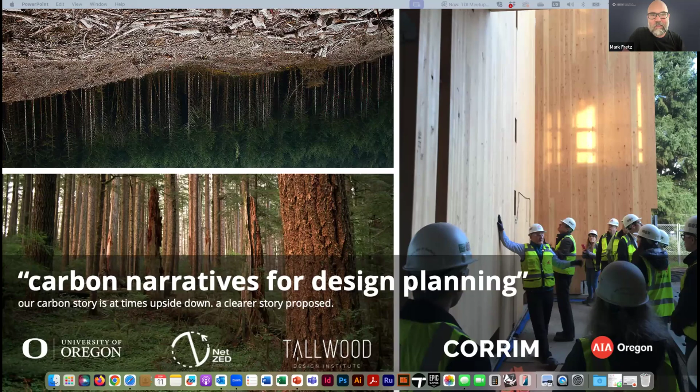We started this in 2020, which is hard to believe, it's just been a long time. At the time we were all very interested in performing, and we still are, whole building life cycle assessments. There are all kinds of different materials that go into those assessments, and as designers you get to choose those materials and have an impact on the carbon profile of buildings.

Yet there were a lot of different narratives out there from different industry groups that were confusing. Some of those narratives included, for instance, that steel is infinitely recyclable, or concrete is durable and never gets taken down, lasts forever. Whatever it may be, we were getting a lot of different narratives. That's why we called this project Carbon Narratives for Design Planning, because we wanted to try and sort those out using scholarly literature and experts in the field, to hopefully come to some consensus about these different materials we're using.

Also around 2018 to 2019, my co-PI, Professor Alison Kwok, who unfortunately can't be here today, was working on a project benchmarking embodied carbon in different mass timber buildings, again using whole building life cycle assessments. I was working with students in a class I have called Design the Unseen, doing similar carbon studies. We both recognized that depending on the analysis tool you used, and the database for those tools, we could get vastly different results for biogenic carbon.

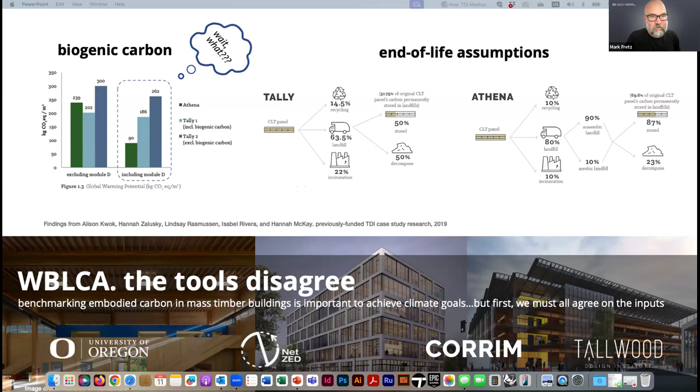That's the carbon associated with living materials, such as harvested wood products. When we asked professionals in the design community, we also found a general sense of confusion and uncertainty of those results, mainly from the mass timber building life cycle assessments due to the biogenic carbon, which got us thinking that we needed to really investigate more and harness the diverse expertise of those in academia, industry, nonprofits, and government groups working on these issues to try to sort these things out.

So this is, again, a large group effort. We've got Ethan here today — he was a huge contributor — but also Alison Kwok was a co-PI, Kevin Vanden Wymelenberg, and several other students. We worked with CORRIM on this project, as well as many guest presenters who contributed. When we first wrote this grant, it was ultimately funded by the USDA ARS through Tallwood.

When we first wrote this grant, we had this idea that we would get everybody in a room in person for a big workshop, and we were fortunate to receive the grant, and then COVID hit. So our workshop idea in person, sorting things out together in a room, was tabled, and we ended up doing something a little differently to approach this.

We started with a survey that was sent to architects, engineers, contractors, manufacturers, government organizations, nonprofits, and academics, wide-ranging groups, to try and figure out the current state of knowledge in 2020. We got 305 responses back, 180 of which were from the AEC community across North America.

And the results of the survey then informed the basis for bringing together these different panels of experts that had a diversity of perspectives. They weren't all on the same page all the time. So we really wanted to foster this discussion from these different groups.

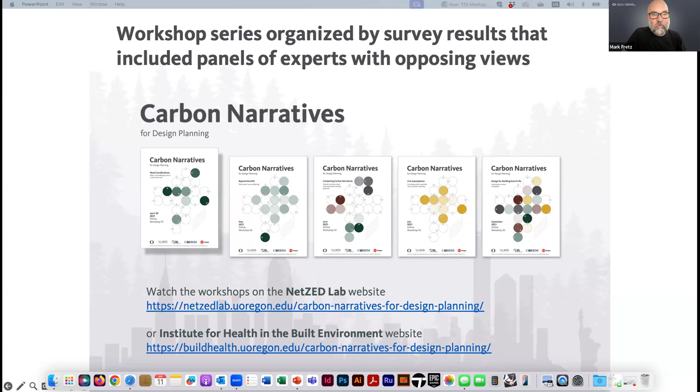Those workshops also served as the basis for further literature review, and we used those to kind of dig deeper into these topics, and then develop ultimately this graphic field guide for design practitioners and students that we could use for things like this, or for seminars that we could structure around this content. This is another kind of major output of this grant.

This is the design guide. Ethan did the graphics for this. I encourage you to check it out. It's really great, and on our website as well.

Also on the NetZED Labs website, and I think Tallwood's website will get this soon once they get their new website up and running. But again, this integrates hundreds of scholarly articles that we reviewed. In fact, this one's got over 250 sources that are cited in this document, and it's presented in a graphical format, so we think it's rather engaging, and not just pages of text.

So really great for designers to take a look at. So that is kind of the context of this project.

And since this project occurred, there have been many great buildings that have gone up, the PDX airport for one, that's really been doing amazing work with mass timber wood products and track and trace, and a lot of things that have gone on since we started this. So I'm going to just kind of start in by giving an overview, then I'm going to hand it over to Ethan to talk about some of these components.

So first of all, embodied carbon, why it matters, why do we care? Well, for one, the global building stock is increasing rapidly. It's expected to double in its current floor area by 2060. So that means we're building a lot, and construction currently represents about 40% of global annual anthropogenic greenhouse gas emissions.

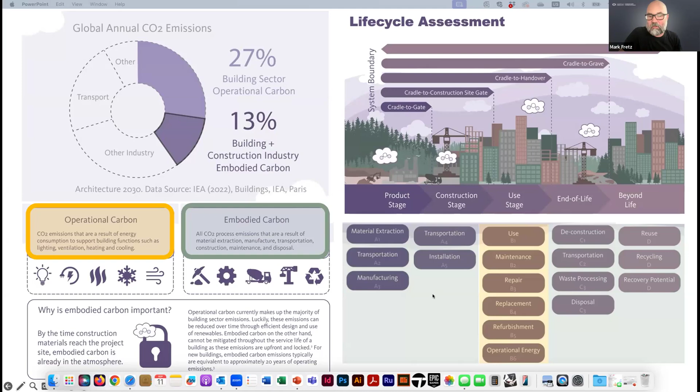When we're talking about embodied carbon, it's important for us as designers or others working on buildings to recognize structural systems and the way we optimize them as the leverage point to significantly reduce embodied carbon, particularly because in mid to high-rise construction, the superstructure of a building alone can drive up to nearly 80% of that building's entire embodied carbon.

When we look at material choices for these superstructures, we're often focusing on either mass timber, concrete, or steel. Comparing the three at face value, timber often presents itself as the lowest carbon alternative, mainly because as a bio-based material it's renewable, relatively less energy intensive to produce, and it stores carbon during plant growth. This makes timber a really powerful tool for climate change mitigation, but it does have some caveats that I'll address in a bit.

Ultimately, most structural systems incorporate some mix of all three materials, so understanding the carbon implications for each is important to use them judiciously. The next several slides will look at the opportunities and barriers for both concrete and steel in terms of decarbonization. I want to preface that while these two industries are generally considered hard to decarbonize, they do present significant opportunities for further decarbonization. The problem is without radical shifts, the barriers and limitations they face will continue to steer them off track from meaningful mid-century emissions reductions.

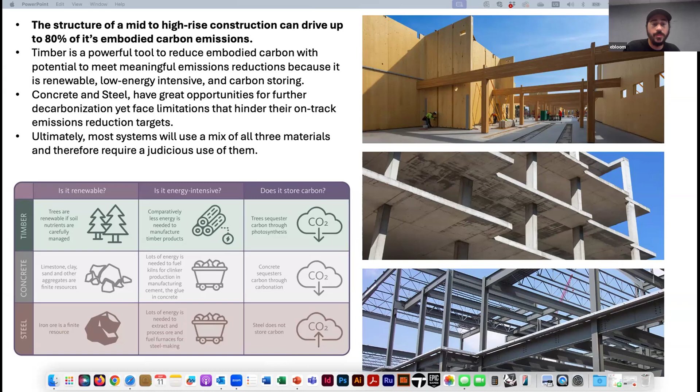Getting into concrete, concrete is the most used building material globally. It's also highly extractive, as it relies heavily on the use of sand, for which there is a global shortage driven primarily by concrete production. It represents about 8% of global annual greenhouse gas emissions, and nearly all of these emissions stem from cement production, but more specifically from forming clinker within cement production, which can drive upwards of 90% of cement's total emissions.

At the core of the concrete industry's emissions is clinker. Lime is a staple ingredient in ordinary Portland cement, and to get lime, immense heat is needed to heat limestone within the kiln. This is often supplied by fossil fuels. Limestone is heated by fossil fuels, which represents about 40% of cement emissions. The remaining 60% of emissions stem from limestone calcination, a natural chemical reaction where heat drives CO2 from calcium carbonate to leave lime.

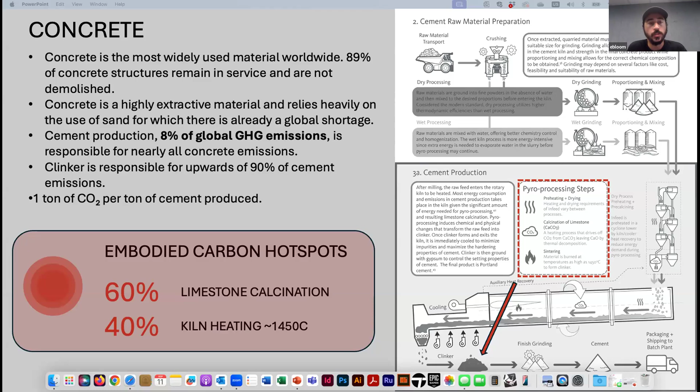Next slide. One of the most common practices today to substantially reduce emissions associated with cement is through the inclusion of supplementary cementitious materials. These are materials that look to partially replace the amount of lime and clinker content. They're often limited by availability or the extent to which they can replace lime before affecting structural properties. For some, such as fly ash or blast furnace slag, these are byproducts of already carbon-intensive processes, so their substitution in cement mixes may have benefits that are overstated from a carbon perspective.

To address the energy used for kiln heating, there's also been research into alternative fuels such as biomass or industrial waste. While these can provide modest emissions reductions, the main concern lies with the burning profile characteristics of these fuels within the kiln and how that might affect clinker properties.

There's also been research into novel binders and recycled concrete aggregate. These often don't make it past the laboratory phase, but novel binders look to replace limestone entirely. These are often hindered by the need for reform of building code and design practices, and they're also associated with higher processing costs, expensive additives, or unproven supply chains. Similarly, recycled concrete aggregate looks to preserve virgin or natural aggregate with the use of demolished concrete. The main limitations are performance concerns and variability of quality, although studies have found the sweet spot to replace natural aggregate is around 30-35% before you start to see a decline in structural performance.

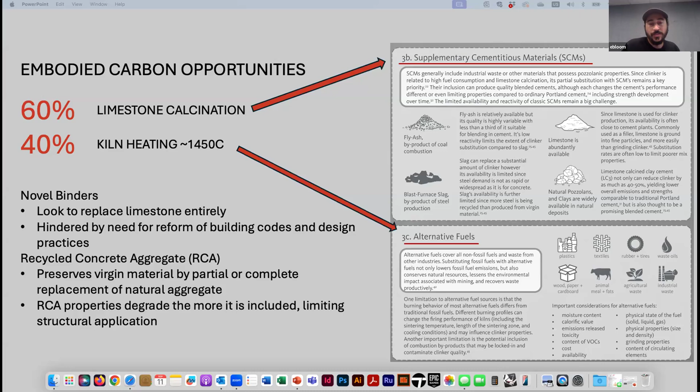Next slide. To wrap up concrete, I think an often overlooked blind spot is concrete's potential as a permanent long-term engineered carbon sink. Through carbonation, exposed concrete surfaces will reabsorb atmospheric CO2 through diffusion, which fills in the microstructure of the exposed concrete with calcite products. The diffusion rates depend on ambient conditions, but ultimately carbonation is a very slow process. LCAs, which use 50 or 100-year time horizons, struggle with how to credit those removals in time periods beyond that. A number of studies point out that LCAs excluding carbonation benefits might be understating them by as much as 20-30% of initial emissions.

Still, concrete emissions are instantaneous, whereas carbonation occurs slowly over decades, and carbonation will never offset the initial amount of emissions. So concrete, unfortunately, still remains a net emitter of emissions, and the benefits of carbonation are less applicable to new construction.

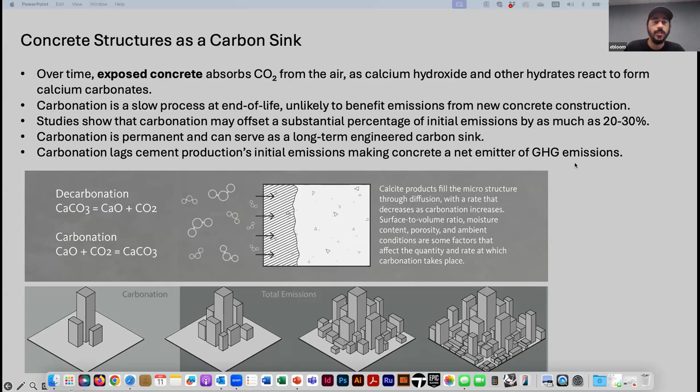Moving on to steel, it accounts for about 7% of global greenhouse gas emissions. At the core of the industry's emissions is the use of coke in iron making within the blast furnace. For context, most surface level iron exists as iron oxides, essentially rust. Iron ore needs to be stripped of oxygen in the blast furnace, which produces molten pig iron. This pig iron, however, is unusable because it's still highly dissolved with carbon, and structural steel needs a metallic iron that's stronger and more ductile.

So kind of counterintuitively, this molten pig iron will move into the basic oxygen furnace, where pure oxygen is blown through it, further dissolving the carbon content from 4% down to 2%. Other alloying elements might be included here for certain desired structural properties. But this is considered the traditional steelmaking method, and it accounts for about three-quarters of global steel production.

On average, it produces just over 2 metric tons of CO2 per ton of steel. The most efficient blast furnace, basic oxygen furnace systems might get it down to about 1.8 tons of CO2 per ton of steel. But the reason why this method remains so commonplace is because it is the one route that can accept iron ore as a main input, and generally high grade quality steel is often associated with or comes from iron ore.

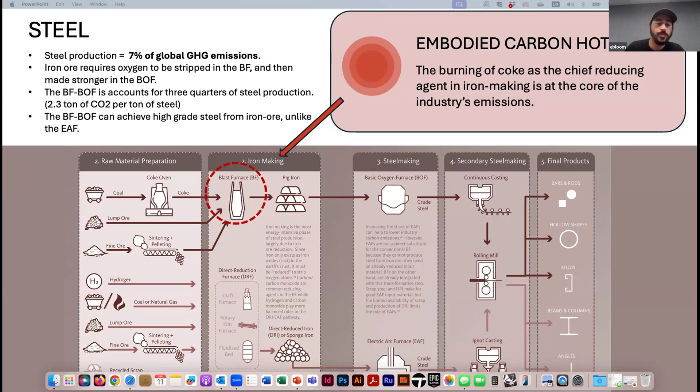An alternative to reduce steel's embodied carbon is alternate process methods. The second main alternative is through the electric arc furnace, which accounts for the remaining quarter of global steel production. It runs on electricity and can produce just shy of half a ton of CO2 per ton of crude steel it produces.

Its main inputs are recycled steel scrap, but it'll also accept direct reduced iron. Direct reduced iron is essentially iron ore chemically stripped of its oxygen within its solid state, skipping the liquefaction seen in the blast furnace, and producing a sort of sponge iron that can then be fed into the electric arc furnace. If you were to pair direct reduced iron with the electric arc furnace, it can achieve crude steel with just 60% the carbon footprint of traditional steelmaking.

If you were to use hydrogen as a clean energy carrier for the direct reduced iron equipment alongside the electric arc furnace, it can come close to net zero emissions. So on paper, the electric arc furnace seems like the way to go and very promising, but the reason why its use is so limited is because it can't accept iron ore as a main input. I'll talk more about the reason on the next slide, but because it can't accept iron ore and depends on steel scrap, there is limited availability of steel scrap, and steel scrap often produces a lower quality grade steel.

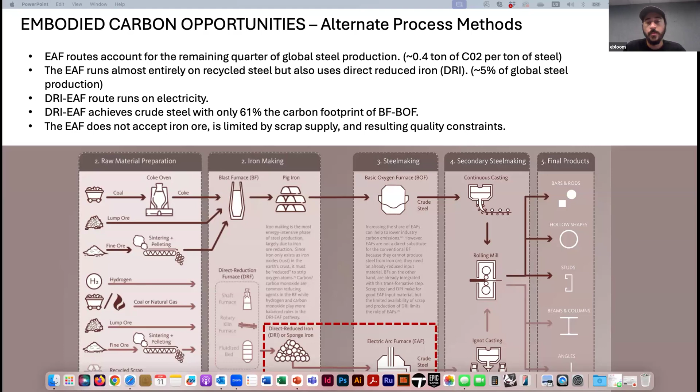A really big pro to steel is that it does have high recycling potential and as such has developed strong end-of-life markets because of it. One of the main barriers, though, is that most steel is currently locked in current infrastructure, so there is limited availability of steel scrap, and this warrants the production of virgin steel with iron ore. Again, iron ore can only be processed in a blast furnace, which is much more carbon intensive, but also commonplace.

Recycling steel also often contains residual contaminants such as chromium, nickel, copper, tin. These are harder to remove metallurgically when remelting, so it makes reprocessing difficult each time it's recycled, and it can negatively affect the structural properties of the new steel. I think recycling steel will become a key strategy moving forward for the steel industry, but it requires improved sorting and collection methods, particularly in other parts of the world where steel scrap might be going underutilized, or if it's happening at all.

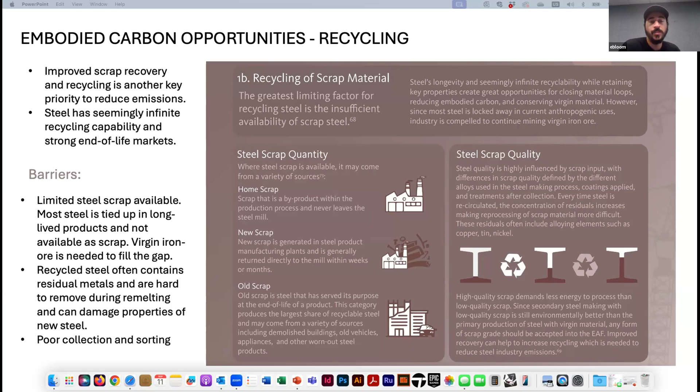And then lastly, for steel, what's considered the sort of game changer for the industry is the use of hydrogen as a clean energy carrier. It exists in large quantities as water, and its byproduct is simply water vapor rather than a greenhouse gas.

The environmental benefit of hydrogen as a reducing agent in iron making will depend a lot on the way it's produced, and so there's colors that dub hydrogen based off how it's procured. Gray hydrogen is derived from unabated fossil fuels. Blue hydrogen from abated fossil fuels with carbon capture technology. And then green hydrogen, or clean hydrogen, stems from water electrolysis combined with the use of renewable energies.

But the success of hydrogen as a clean energy carrier will depend on its feasibility to scale up and mend the infrastructure gap. Green hydrogen, at first, is already more costly than the use of fossil fuels. It would also require a huge electrical demand, and therefore a large expansion of renewable energy. Hydrogen as an element is also a very tiny molecule that can easily leak, so it requires high pressures and low temperatures, making storage, transport, and handling challenging.

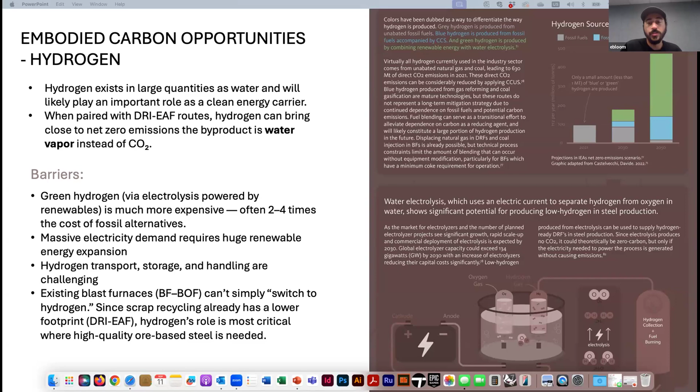So back to timber, I had mentioned earlier that timber presents itself as the lowest carbon material, but timber is only sustainable if the forest management behind it is as well. And I won't get too much into what sustainable forest management means, because I think it means a lot of different things, and the definition will change depending on who you ask.

Different forest managers prioritize different goals. But I think at the very least, it should ensure that forests remain forests, but also help to improve forest resilience, amidst directional climate change, where it's crucial to carbon dynamics.

Speaking of forest carbon dynamics, they are driven in large part by disturbances. Increasing frequency and severity of disturbances are evident in many forest ecosystems globally. And a warming climate alone could lead to extensive tree mortality over time, as seen in the case of drought, where induced moisture stress can surpass plant physiological thresholds, leading to tree die-off.

The same warmer and drier conditions that induce drought can also spur positive feedback loops that reinforce the next wildfire or insect outbreaks. These disturbances can cause large-scale tree mortality within a relatively short amount of time. These all impact forest vegetation growth, reproduction, survival, and distribution. And because this is carbon narratives, from a carbon perspective, they can also significantly alter forest net primary productivity.

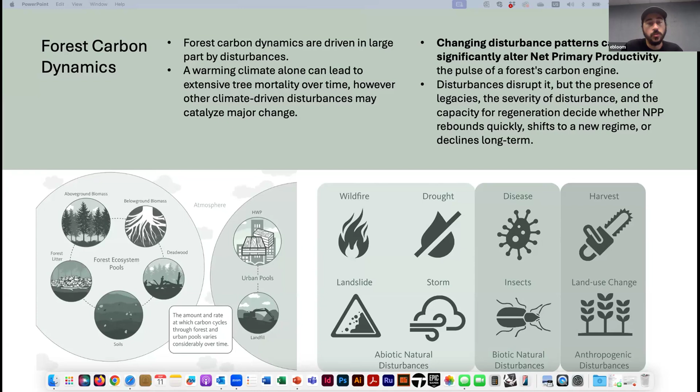So disturbances disrupt net primary productivity, but forest resilience and the capacity for forest regeneration will determine whether it rebounds, shifts to a new regime, or declines long-term.

It's really important to emphasize and improve on forest resilience, which is the ability of forests to recover post-disturbance. And a lot of the ways that forests manifest forest resilience is through disturbance legacies.

These are the physical and biological markers, traits, species adaptations, and features that are left behind in a forest post-disturbance. And so these can include deadwood, root systems, surviving plants, seeds, spores, and animal populations. All these act as a sort of memory bank of the pre-disturbance forest, and they carry forward the ingredients that make recovery possible.

Disturbance legacies help to facilitate regeneration, ensuring that forests regrow faster and more effectively than if the area had to recolonize from scratch. They maintain biodiversity, supporting a diverse ecosystem through the recovery period.

What's really important is that they also enable adaptation to future disturbances, improving the forest's ability to cope with repeated or novel stresses. And I think this is really where the concern lies, because climate-driven disturbances now will likely catalyze rapid reorganization of forests through a series of abrupt and episodic events which can erode the ecological memory of forests to disturbances. This can create a resilience debt that then shapes forest trajectories, determining whether they'll remain forests or some other type of land use.

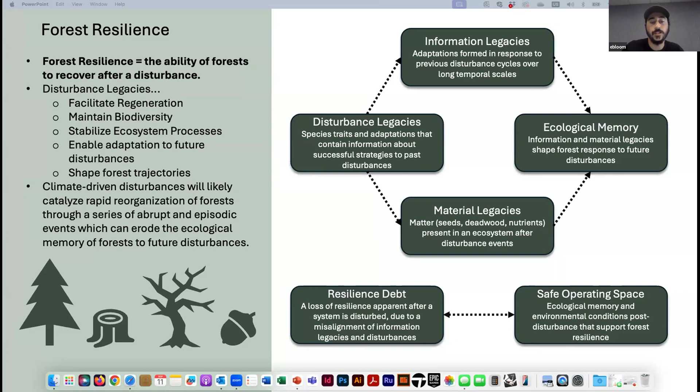I think an important way to achieve forest resilience is by using wood more efficiently rather than extensively, so as to ensure that forests remain forests via an increased safe operating space. By increasing that buffer of what we harvest versus what we leave intact, it maintains natural regeneration and productivity, ensuring that forests don't lose the ecological engine that allows sustainable yield.

Protecting biodiversity and ecosystem functions works within the contextual bounds of forests. It avoids overharvest, but maintains genetic diversity. And also just working to grow resilient forests reduces the risk that timber supply collapses after an extreme event, thereby supporting long-term carbon storage and wood yield.

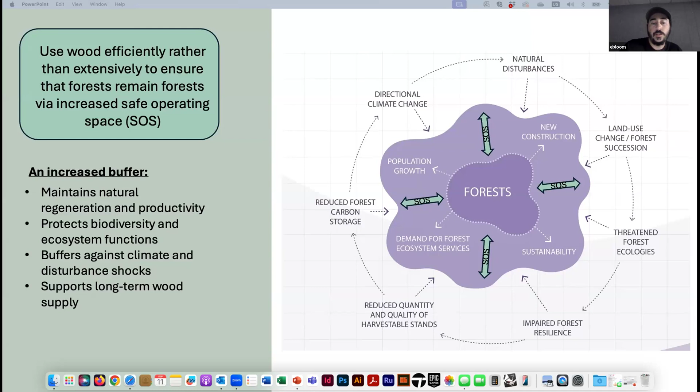Okay, next slide. So life cycle assessment, or LCA, is a really important tool for us to be able to compare what we're designing with alternate designs and benchmark buildings.

This also reminds me of this old quote from George Box that all models are wrong, but some are useful. And actually, I think these LCAs are extremely useful, but we should also recognize that they're complex assumptions from these really dynamic systems that are going into these models, and so that's where things start to get a bit complicated.

So we often hear that wood is carbon neutral because it's a renewable bio-based material, which will be replaced by another tree, sequestering its associated carbon after it's extracted. But carbon neutrality does not always equal climate neutrality based on timescale.

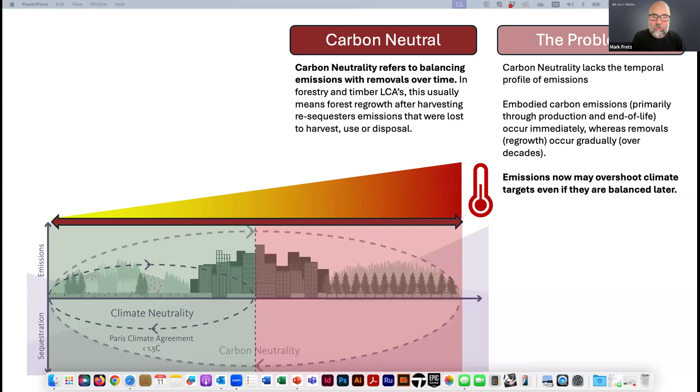So carbon neutrality makes several assumptions, such as steady state forest regrowth, and it can also discount the complexity of emissions and sequestration. So being carbon neutral does not mean that we will necessarily meet climate goals, which are climate neutral, because those emissions occurring now may not have enough time to be offset as we try to target the drawdown within the next few decades. So that temporal aspect is important.

Climate neutral considers that the timing of carbon fluxes varies with time horizons, cycles of forest regrowth, and disturbance risks, for example. So if tree mortality accelerates, sequestration assumptions may be too optimistic. So those are a few of the things that need to be considered.

So to allow time for offset of carbon emissions, harvested wood products should be converted into building products that are long-lived. That's important. Harvesting trees solely for bioenergy production is an example of a wood product that's not necessarily climate neutral, even though it would be carbon neutral, since this would produce more immediate atmospheric carbon during the period in which we must be reducing atmospheric carbon to meet climate goals, and has to do with the longer time scale required for that carbon reuptake to be considered.

So that's an important consideration as we think about selecting materials and using them in a way that allows their long life and durability.

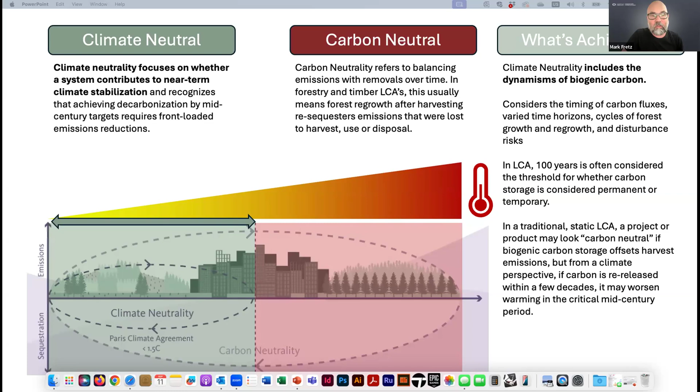We began the project again in part due to the widely variable LCA outputs, and therefore the uncertainty in the models that designers were encountering, especially when examining bio-based building materials due to the biogenic carbon, which is known as the module D component for LCA.

We've since learned that modeling carbon flows is difficult, and it requires large models that make assumptions and inputs from other large models. For this reason, many current LCA tools use a backward-looking approach to assess carbon sequestration.

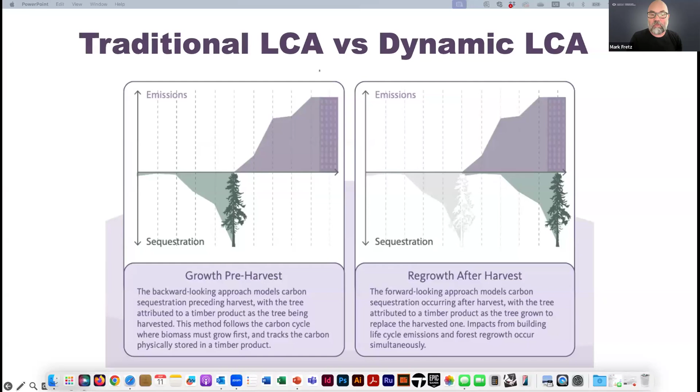So moving into more timber cities, into developing and growing timber cities. Ethan, I'll let you talk about substitution benefits. Sure. So up until this point, assuming that we're sourcing our timber from sustainable forest management, being good stewards of forests, we can now really maximize the benefits of timber as a bio-based material.

And that starts with substitution benefits. The choice alone to use a lower carbon material like timber in place of a higher embodied carbon material like concrete or steel provides immediate emission savings, which is crucial from a climate neutral perspective to address near-term mid-century reduction goals or targets.

Some might argue that substitution benefits for timber are overstated because LCAs don't allow enough time for other industries to decarbonize. But the same can be said for the timber industry, which is always looking to improve. And we're concerned with near-term reduction targets. A lot of LCAs comparing timber products to concrete or steel counterparts in varying contexts oftentimes show timber with the lower global warming potential. So substitution provides immediate emission savings.

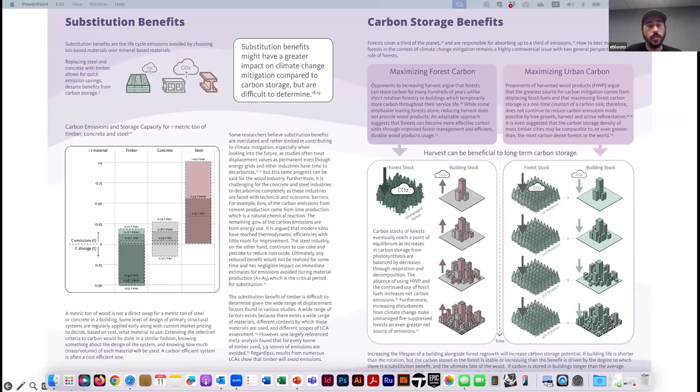On the other hand, maximizing carbon in both forests and the built environment, working with steady state forestry, where new stands of forest maintain or even surpass the carbon levels of the forest that preceded it, you can then begin to allocate carbon into the built environment and create a continued benefit or contribution to carbon storage that maximizes the overall land sink.

So as we transition to timber cities, we can have a significant reduction in carbon emissions by 2100 based on the studies that we found. One of the studies we found pretty important was by Mishra et al. in 2022, which found that if 90% of the population lived in timber cities by the end of this century, this could realize a 77% reduction in atmospheric carbon over business as usual approaches.

Part of that, though, requires sustainable forest management and keeping forests as forests to realize these benefits. We need to be mindful that wood products are produced with sustainable forest management, as Ethan talked about earlier, and that we maintain strong governance and careful planning to protect frontier forests and biodiversity hotspots. According to Mishra et al., in addition to protecting frontier forests, this transition would also require an increase in trees and in global forest plantation areas, which is still possible alongside land use for other agricultural food production processes. So that was their finding, and the paper was pretty influential in our ultimate findings to this project.

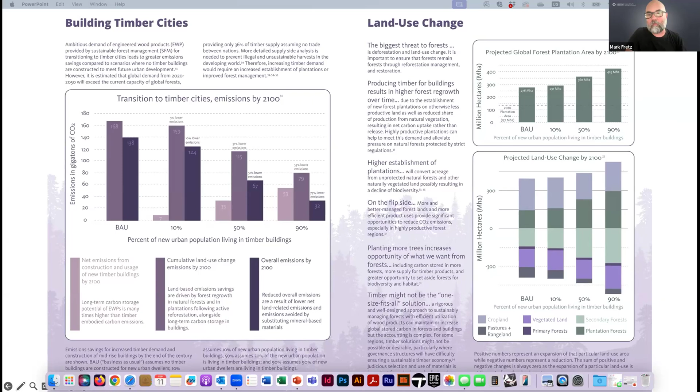Wood product certification and chain of custody are also important for designers to feel confident that their material selection is what they expect. So with that, I think we can give the main takeaways that we had for this project.

We had a lot of different takeaways, but the top takeaways were that first of all, global building stock is expected to double by 2060, and we're building a lot. So it doesn't matter whether we're using timber, steel, or concrete — all materials have impacts, and we need to be careful with how we use them.

Buildings account for 40% of global CO2 emissions. So we've got a role to play in mitigating climate change as designers, and can really focus on the system that we're using. Embodied carbon becomes locked in today's building projects and cannot be reduced over time like operational carbon, so we really need to be mindful of that during the design process.

Building structural systems are the largest source of embodied carbon in a project, up to 80%. So really focus first on the structural materials, which will have the greatest embodied carbon impact. Structural materials that are bio-based, such as mass timber, offer a potential solution to mitigate these embodied carbon emissions. The quickest means to reduce global warming potential at the material level, though, is to use all materials efficiently, and therefore use less of them.

Reuse existing structures is a great way to do that. Reuse existing materials, and substitute carbon-intensive materials derived from fossil fuels with low carbon materials.

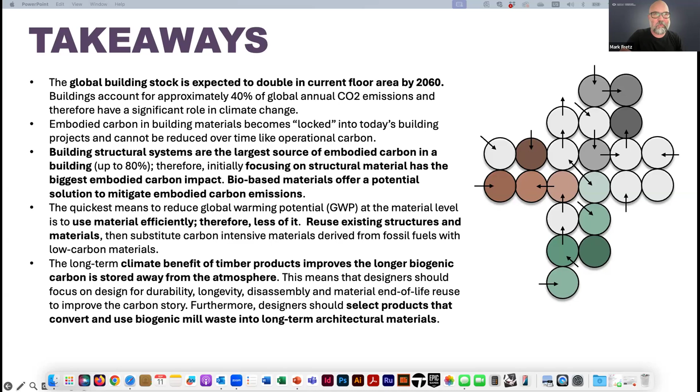Furthermore, we should select products that convert and use biogenic mill waste into long-term architectural materials. I'm a big fan of wood fiber insulation—that's one material, for instance, that converts that waste. Those are a few of the initial takeaways. I'll let Ethan talk about a few others.

Back to the forestry aspect of it, letting trees mature without harvest would only create a one-time benefit of carbon storage. Active forestry does have a place in creating a continued contribution to carbon storage. This also creates a paradigm shift from buildings as carbon sources to buildings as a carbon sink. This is particularly true for the transition to timber cities.

A lot of modeling studies often see timber as a viable climate change mitigation solution because of its lower global warming potential. But I urge designers to interrogate or at least better understand LCA assumptions, because biogenic carbon is very complex. We touched on this a bit with dynamic LCA, which looks to paint a more holistic understanding of the carbon story for wood products.

But there's still a lot of unknowns and uncertainties in how to accurately model or account for it. So just being aware of those assumptions you see in your EPDs or whatever would help you make better decisions for sourcing and procurement of wood.

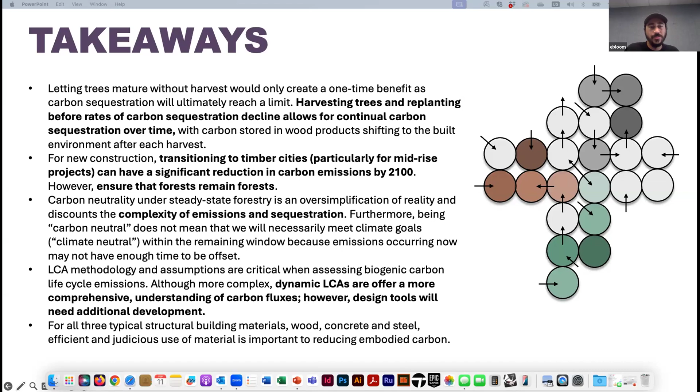With that, I think what we're going to do is shift gears and ask Blaine to present and then take questions at the end so we can integrate both projects. This was the highlight, but enough material for a whole semester seminar, so you should go to our website and look at the full document which has even more content in there. There definitely was a lot that we did not get to cover.

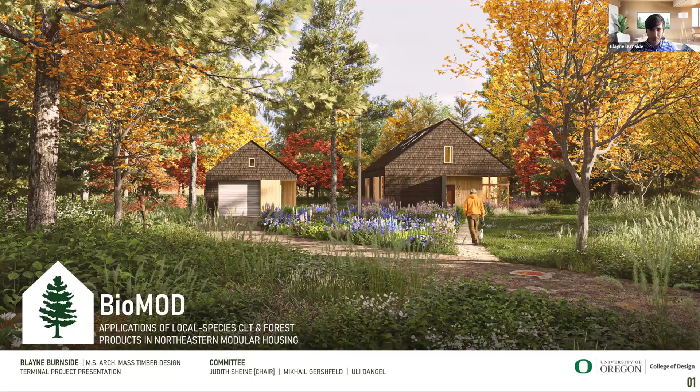So I'm going to shift focus a little bit. While the carbon narratives really focused on the broad scale integration of mass timber into big construction at large, I was interested in looking at a different kind of comparison—how mass timber really measures up in its related construction system considerations to light wood frame conventional systems for low-rise residential construction, something where mass timber is not as focused, rightfully so at this point.

But first of all, I'd like to thank you all for being here. My name's Blaine, sorry I forgot to introduce myself. I'm a recent graduate of University of Oregon's Master of Architecture, Master of Science of Architecture programs. What I'll be showing you today pertains to my Master of Science terminal research project, which had to do with mass timber design in the residential sector, and covers carbon analytics with some of the analyses I'd conducted.

So the project, I named it BioMod, and it looks into the applications of local species CLT and forest products in modular housing for the northeastern United States.

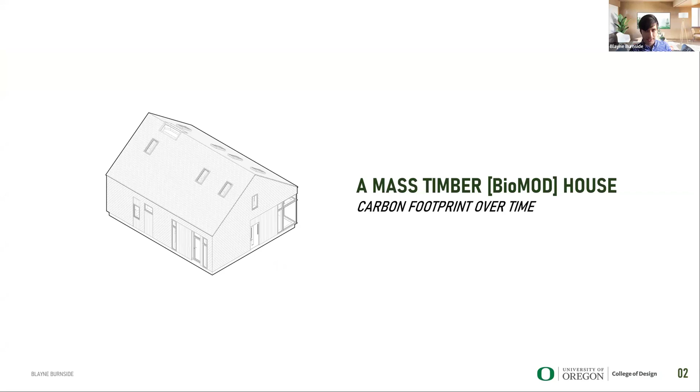So the main objective of this project really was to devise a panelized mass timber housing system for single-family residential application, which prioritizes the use of biogenic materials and a reduction of necessary finishes beyond the structural elements.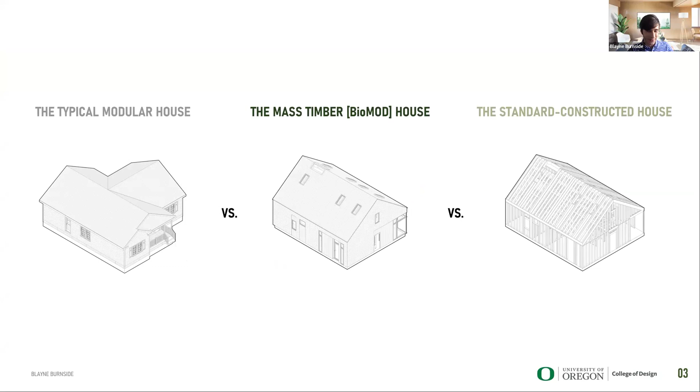After which, the idea was to compare my design system between two other cases of relevant conventional construction typologies. On one side, the BioMod design system was to be compared with the current typical construction typology within the modular housing industry itself. On the other side, I wanted to see how the biogenic mass timber system compared with conventional lightwood frame construction and its associated common practice material palette.

Overall, the project was comprised of three main parts: background research, the design of the BioMod system, and analyses, where several areas of performance characteristics and quantitative metrics were looked into.

For the purpose of our discussion, I'm just going to mostly focus on giving you a general overview of the BioMod design system itself, providing some background, and of course, the comparative analyses of embodied carbon that had been performed between the three construction systems. So let's get into it.

To begin, the focus area of the project is really formed around three primary motives: to portray the use of locally made mass timber for the northeastern United States specifically, demonstrate the benefits of biogenic materials in buildings, a place where carbon plays a key role, and support the rural housing sector and forestry in the region.

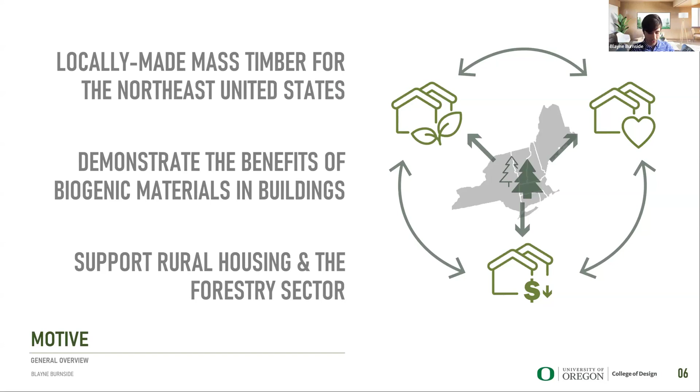From those motives, as well as through the background research I pursued, it was ultimately determined that my project would focus on designing single-family modular housing using eastern white pine as the tree of choice for mass timber in this project. It's all hypothetical.

I would then, of course, conduct a series of comparative analyses between my design system and the related conventional systems in an effort to reveal the potential competitive advantages of biogenic mass timber assemblies in low-rise residential application.

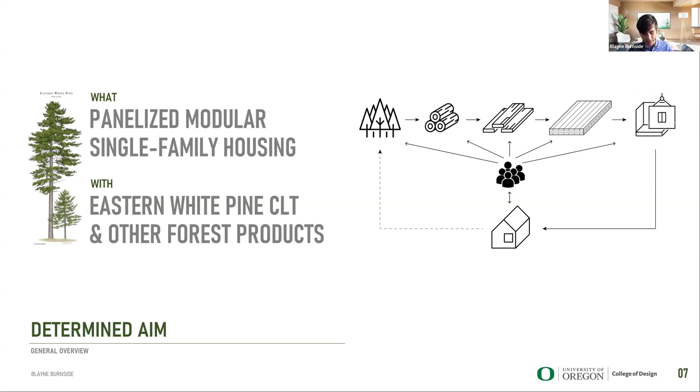I also looked into several volumetric and panelized modular mass timber home case studies that already exist in North America, which is very promising because it supports the notion that there is some degree of interest for mass timber integration into the low-rise and mid-rise residential building sectors.

Mark and Ethan very clearly touched on carbon in the built environment and why it's so important. Architecture 2030, in 2023, actually updated the quantity metrics of the total embodied carbon in the built environment up to 42%, with about 15% being related to construction materials and their fabrication. So the quantity of the pie has only gone up since the 2022 metrics, which is only even more of increasing concern. It's a big deal because we're seeing more frequent and extreme climate events, and carbon emissions, of course, are a primary culprit of that.

Various ways we can really work to reduce carbon impacts of the building sector include decreasing operational energy demand through properly designed enclosures, prioritizing renewable source carbon sequestering materials, and sourcing them locally to reduce transportation-related emissions.

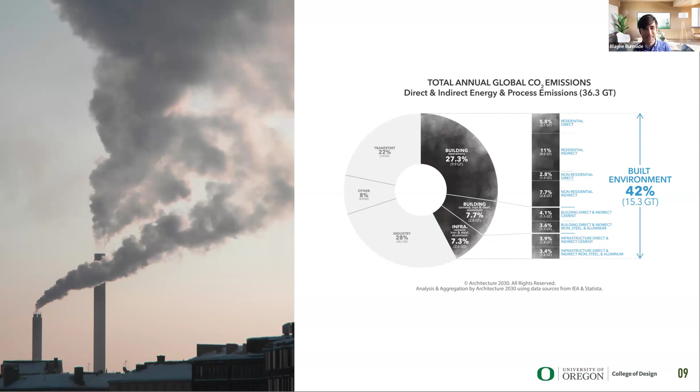So this project pertains to modular homes, and the general modular home industry looks like this, where modular homes are just another common housing solution beyond standard site-built houses in the Northeast and the United States as a whole. These homes are prefabricated off-site and shipped in whole volumes to be stitched together on site. After this, the volumes have been taken off their steel shipping chassis so that they can be treated as a standard home as far as codes go.

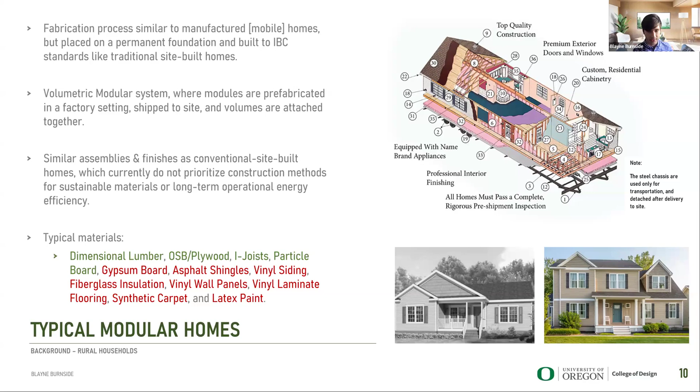Their construction assemblies are also much like that of new construction conventional site-built homes, which consist primarily of materials from non-renewable sources beyond their structural members, several of which may be adverse to occupant health. Many of these materials, though, are not necessarily dependent on the structural typology, but are simply the industry standard materials of choice at this time—things like fiberglass insulation, gypsum wallboard, those kind of things.

So where could mass timber products come into play with this modular industry to make improvements? Well, as biogenic engineered products that can take the form of large structural panels, such as cross-laminated timber, a mass timber constructed home could reduce materials usually associated with being needed to cover up light wood framing. It could derive a house proportionally made from more renewable material mass, and of course, sequester more carbon.

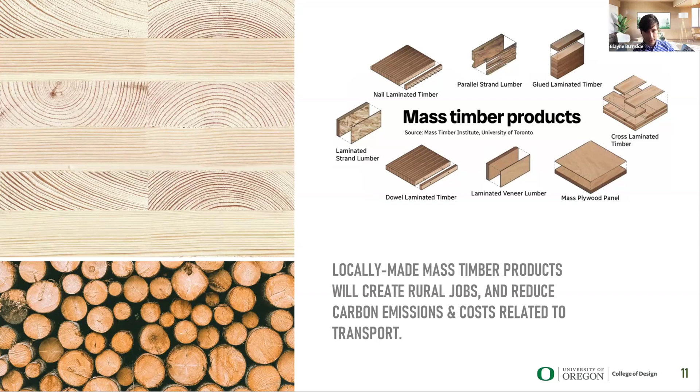This is a result of being physically more massive fiber taken out from the forest, so keep that in mind. If CLT were also produced locally instead of being imported, it could create rural jobs and reduce the carbon emissions and costs related to that distant transport.

So those are really some of the general conditions that the project set out to respond to. Now let's see what mass timber could actually do in action in this sector.

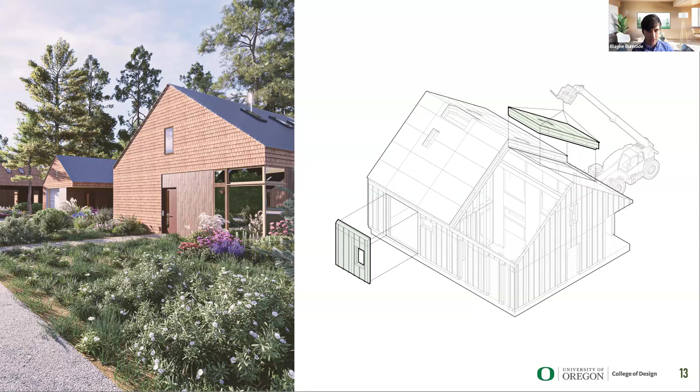The BioMod system is what I devised, an additive panelized mass timber modular design for single family dwellings. It works on an 8-foot wide CLT panel module, which can be easily shipped and evenly divided into smaller parts when necessary. It's a system designed for expandability, where the construction assembly and module layout enables aggregation, as do the construction details, which I won't be showing today. A panelized modular system was chosen over a volumetric one because it allows for greater flexibility in variable expansion, as well as efficiency in shipping the parts.

The assembly panels are designed to have the insulation, weather-resistant membranes, and furring prefabricated to the CLT panels before they reach the construction site, after which the exterior cladding is attached. This would increase the efficiency of the panelized modular construction by reducing the time needed for on-site assembly, which would in turn save on labor costs, construction emissions, and reduce potential error caused in the field.

In case you're wondering about the architectural form, the BioMod system was designed to be rooted in the Northeast. I know we're in the Pacific Northwest, whose vernacular principles are generally centered around a compact form and gable roof, most appropriate for the drastic swing in winter and summer climates in that region. These formal principles would aid in optimizing the energy efficiency of these homes.

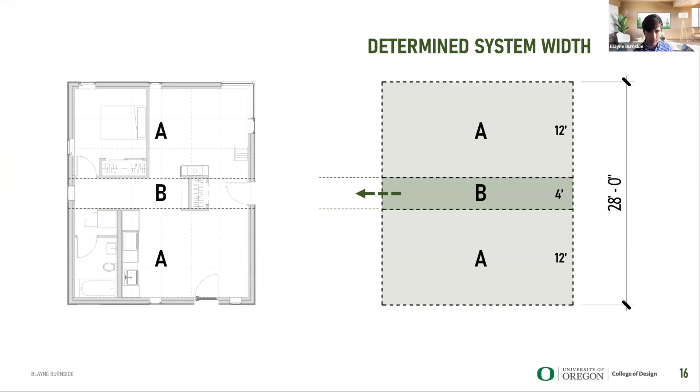Through iteration, it was determined that this system would work on a defined 28-foot width, with expandability focused on one axis. At 28 feet, the layout provides an organization of a centralized 4-foot circulation datum flanked by two 12-foot bays, a dimension that's typically deemed accurate and adequate in providing comfortable living space.

The starter home is the base condition of the design system, where predetermined space modules are organized into a functioning home. With an interior floor area of roughly 672 square feet, the starter home expresses the intention by which biomod houses are designed to be relatively compact, in order to lower the overall footprint of the home to reduce initial costs, ongoing energy demands, and total embodied carbon of the construction.

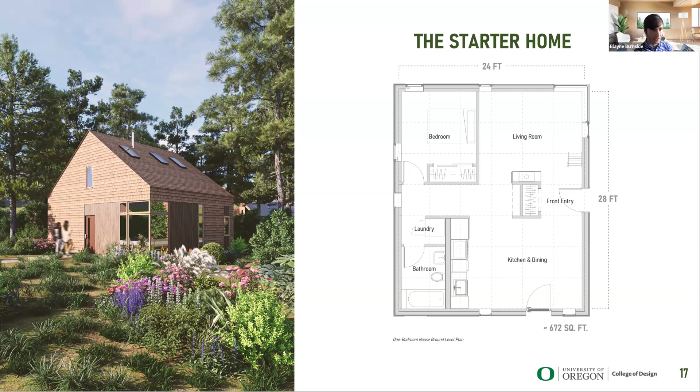As mentioned, these houses are designed to be expandable as part of the modular system, which helps support aging in place, where individual households and families are able to grow within a home that can grow alongside them. This really helps to form and retain genuine communities, and lower the vacancy rate of housing.

All of which enables a mindset for society to hopefully focus on long-term investment and care, a place where mass timber would have the greatest advantage. With the ability of a biomod house to start small and grow later, this reduces the initial cost barrier from home buyers, as well as on our forests up front.

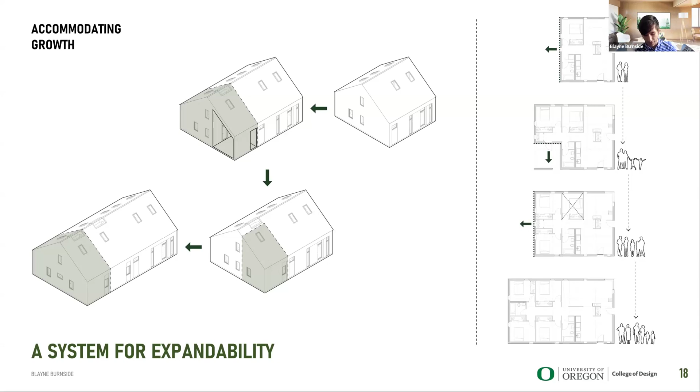As for shipping, the efficiencies achieved as a result of the panelized modular system of 8-foot wide panels mean the components of a house can simply be flat packed on a standard semi-truck and brought to the site. This really helps to avoid the carbon emission penalties associated with oversized load shipping, for instance.

We need pilot cars in some scenarios. The pieces of the starter home, for instance, could all fit on a single semi-truck, after which 2 or 3 semi-trucks would be required to ship a whole larger house at once. I guess this doesn't include the windows and doors that would also need to be shipped.

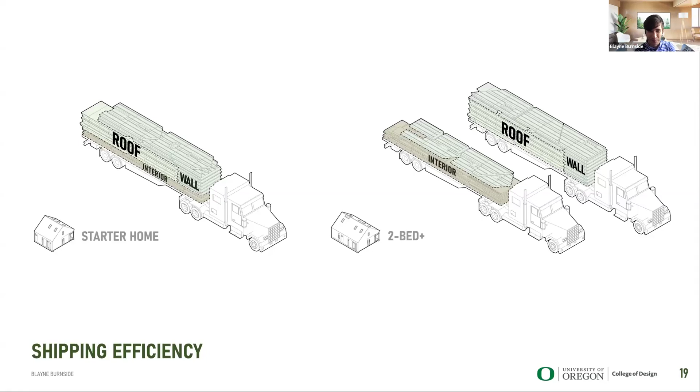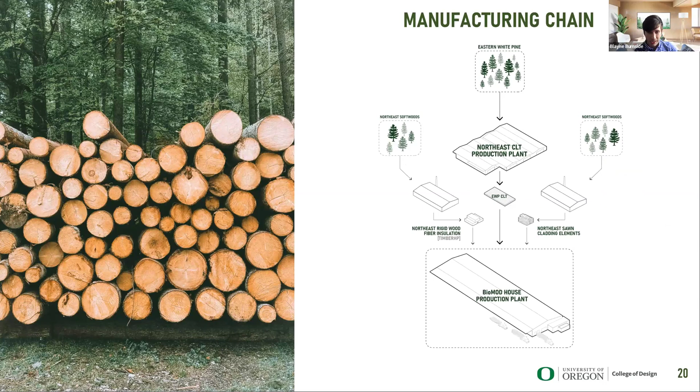Looking at a theoretical manufacturing chain: almost all materials above grade come from timber, so the CLT material would optimistically be sourced from sustainably harvested eastern white pine, produced at a CLT production facility located directly in the Northeast. Obviously this doesn't exist yet. Forest products would then make their way to a production facility where the biomod house panels and kits would be prefabricated.

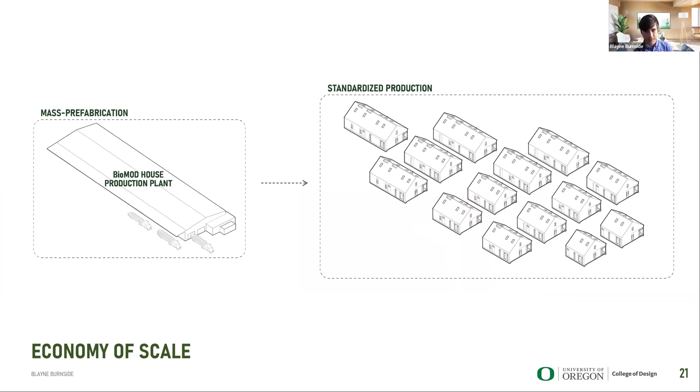Once at the production plant, the biomod homes would ideally be produced in a volume of standardized units, which is also the method in which current manufactured and modular homes are brought to market. This aids in driving down unit cost, making a mass timber construction system relatively more affordable. As the design is comprised primarily of renewable biogenic material, the system could possibly function as a closed loop of efficiency in the long run, in a perfect world.

So this all comes together again to form a home that's designed to be compact but feels spacious at the same time, while also reducing the need for finished materials, yet improving biophilic qualities of interior living space. I hope that provided a good enough overview of what the house design is. So finally, let's get into looking at the carbon narrative between the mass timber system and conventional ones.

To begin, the various analyses are structured in an organized and consistent fashion, where a representative typical modular house that I designated through background research is set against the representative biomod mass timber house in the center, as well as a standard conventional light wood frame constructed version of the biomod house design, compared on the right.

Keep in mind that the typical modular house model is larger in square footage than the biomod house and its light wood frame constituent. This is intentional because the system I derived has a smaller footprint for the same type of home, being 3-bedroom, 2-bathroom in this case, the average sized home in the Northeast. So we'll mostly be focusing on carbon analyses that I did through life cycle assessments.

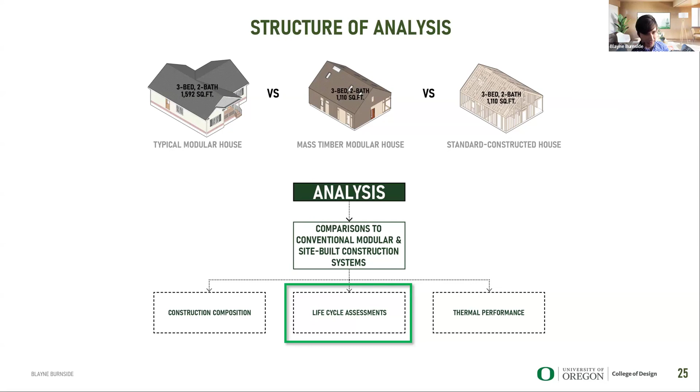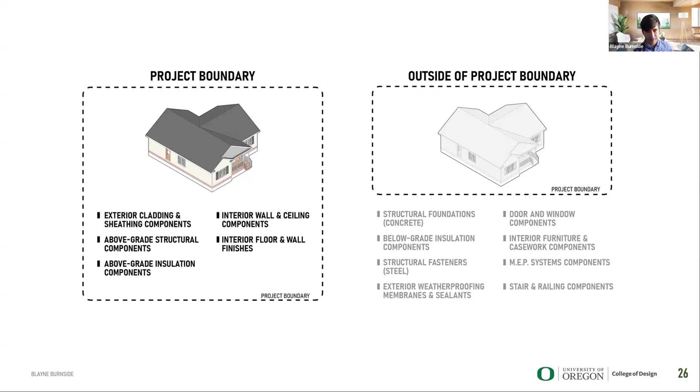Before I go further, it's important to note that the project boundary for these studies does not include every aspect and component of the whole construction of a home. Instead, aspects that remain relatively consistent as part of each building system's character definition are kept in the project boundary, whereas components that would easily fluctuate in character and method are not included. So this means foundations and steel fasteners are excluded from these studies, among other things, which of course would affect the end results of a true construction type.

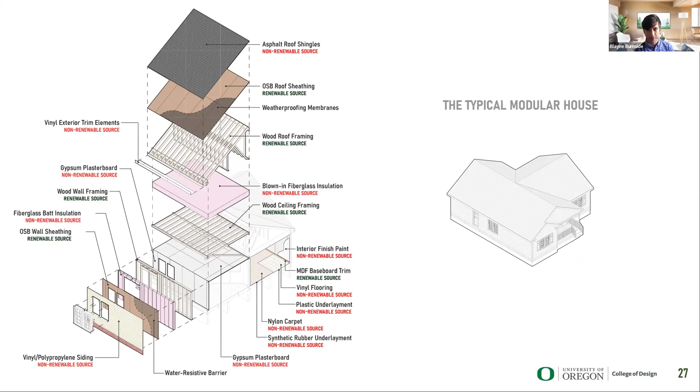So this is a typical modular house assembly. It's a light wood frame constructed system with an unheated, ventilated attic roof structure. As you see, almost all the materials that go beyond structural framing and sheathing are made from non-renewable source materials, as the typical industry standard material choice.

Looking at the proposed mass timber home, the opposite is true, where almost all materials come from renewable sources, being trees in this case. Different from the typical modular house, the attic space is now included as a loft level within the conditioned space. I'd like to point out that this is located in the Northeast, so wildfire is not necessarily as big of a concern as to why I have wood cladding on this home.

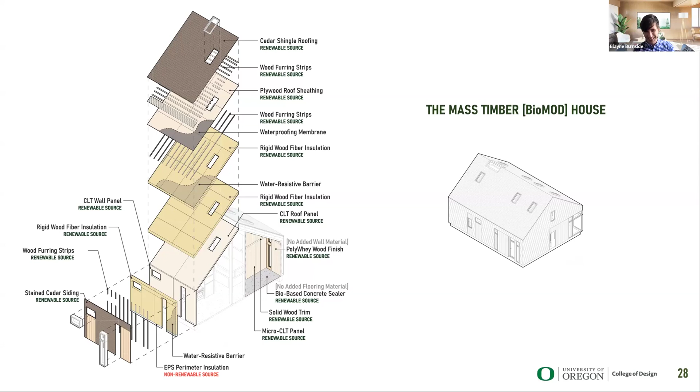Looking at the last system, the same formal method for the light wood frame version of the design remains true. The system shares the same cladding and ground floor elements as the mass timber house, since those aren't directly dependent on which structural system is used. This was to keep everything even.

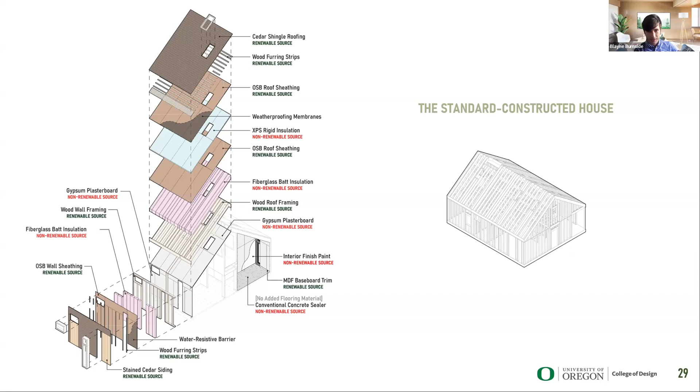The prong of analyses we're focusing on is the life cycle assessments, which will map out the carbon emissions and global warming potential of each building system using the traditional life cycle assessment method. I used One Click LCA software as the analysis tool of choice, where I did my best to select the most appropriate environmental product declaration within the platform for each material.

Various LCA scenarios were mapped out in order to get the big picture of each system's embodied carbon characteristics within the study boundary. It's important to note that for the purpose of this analysis, transportation-related carbon, repair percentages, and operational energy were omitted, as those could vary among each system.

In One Click LCA's 60-year benchmark score assessment on the left here, it provides a little snapshot, and even so, the biomod house wins as the most sustainable construction type in terms of carbon emission. But let's see just how.

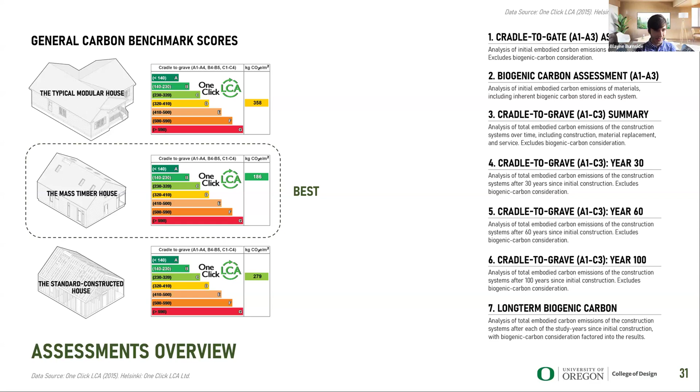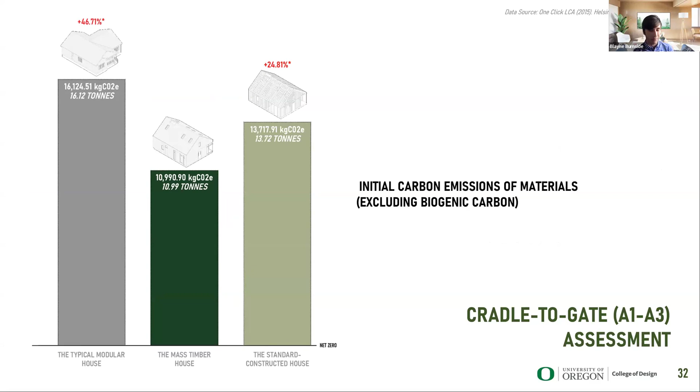A cradle-to-gate assessment analyzes the carbon of a building only up to the point when the materials reach the construction site. This is useful because it displays only the amount of carbon inherent in the building materials themselves. This graph shows each system's total initial carbon emissions by the time materials reach the construction site, but this does not yet consider the inherent biogenic carbon stored in some of the materials involved.

If we fold in the biogenic carbon, you can see that the sequestered amount between the two light wood frame systems and the mass timber system are significantly different, with the mass timber, due to its sheer volume and mass of fiber, storing a lot more carbon.

So why is biogenic carbon important at all? Well, this is carbon that's been pulled from the atmosphere and held within the structure of an organic substance or plant during its life.

In terms of construction, these materials represent the embodied amount of carbon previously pulled from the atmosphere and now banked within the building. Having biogenic carbon stored in a building can help delay the rate at which carbon would be re-released into the atmosphere if left as a plant to naturally decay, which can be a great advantage in delaying or reversing the effects of climate change.

The longer a building with biogenic carbon can last, the longer it can actually sequester that carbon, which is why the need to build longer lasting buildings and housing stocks is important now more than ever. Bottom line, if you want to use biogenic carbon as an advantage, you better make sure the structural system can last longer than the tree will remain standing in any given forest stand.

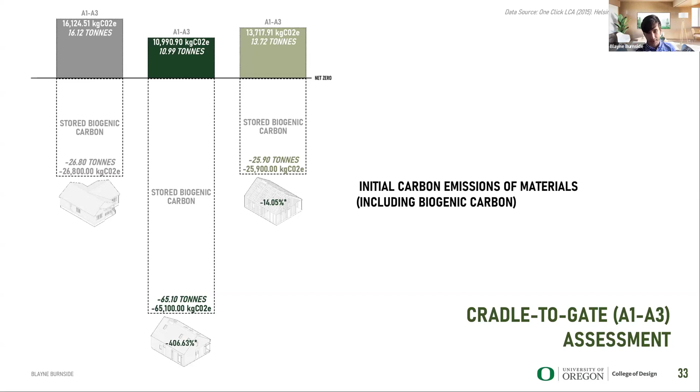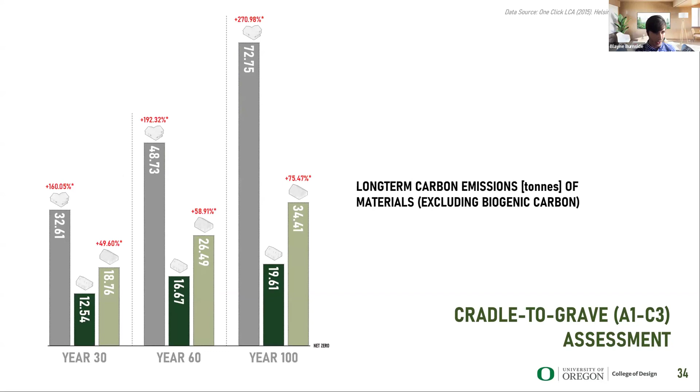Next we'll be looking at the total carbon footprint through a cradle to grave period of 100 years. I've distilled the data of carbon emissions for each system after 30, 60, and 100 years. One thing to keep in mind is that the structural materials of each system were not given a service life, so we'll assume all three homes would last for a century regardless.

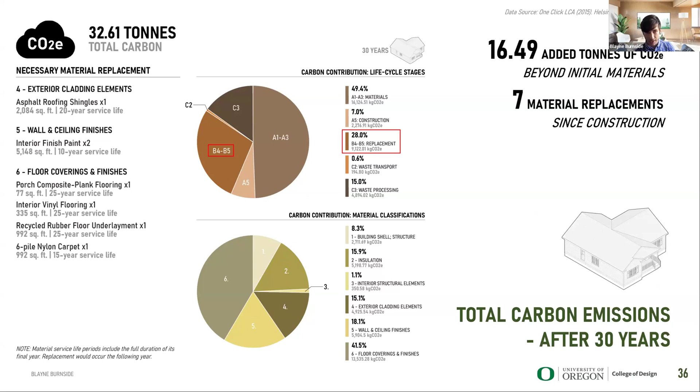Let's look into some details of why those numbers were so high. After just 30 years, the typical modular house has added 16 more tons of carbon to its total emissions, doubling its amount, as a result of material replacements needed due to reaching the end of their service life — the wall finishes, floor covering finishes, and asphalt roofing at this point. You'll see that B4, B5 material replacement section on the carbon contribution pie gets larger and larger as a trend, representing all the service lives being replaced over time.

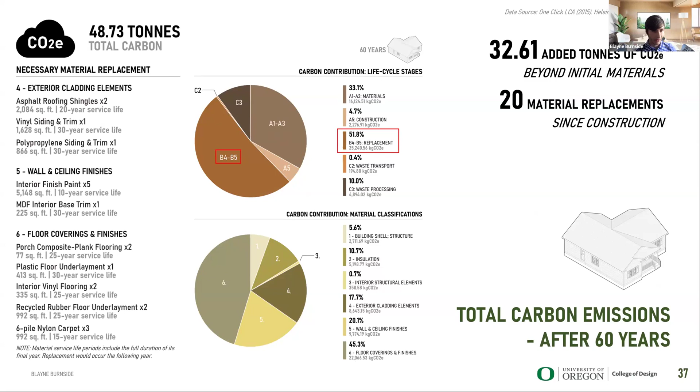After 60 years, the total carbon emitted by the typical modular house is about triple its original amount, almost 49 tons. There have already been 20 instances of material replacement at this time, with materials like the nylon carpet needing to be replaced 3 times and the entire house repainted 5 times. These are all defined by the service lives in the EPDs.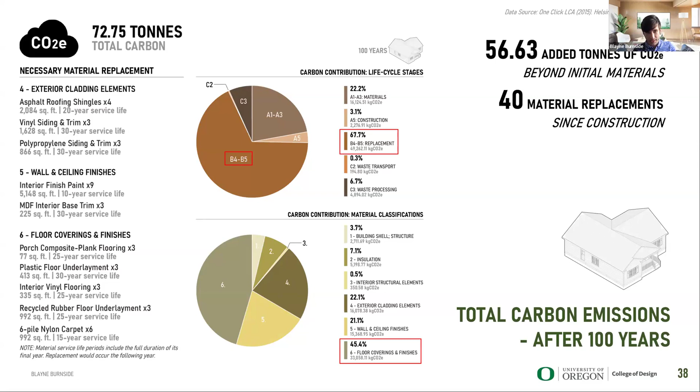If we look at a mass timber home, after 30 years, just about nothing has changed from its original state, save for the considered carbon related to the construction process. There's no need for material replacement at this time — a testament to the reduced amount of finished materials in the construction.

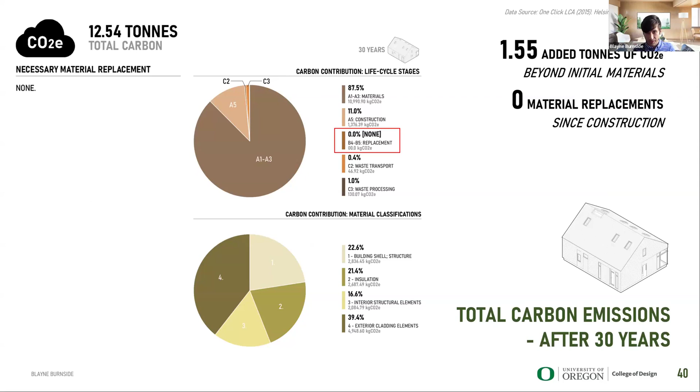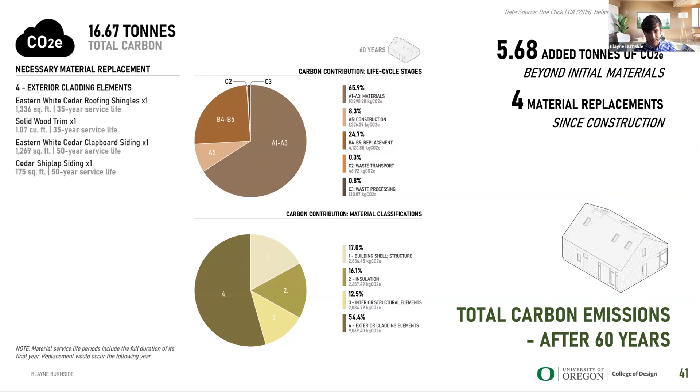By year 60, the all-wood exterior cladding needs to have been replaced, adding around 6 tons of carbon to its initial 11 tons emitted. After 100 years, the mass timber home's total carbon emission has not even reached 20 tons. This is good, relatively — material replacement is minimal, with only exterior cladding elements needing replacement, the advantage of reducing the need for finished materials in a construction system.

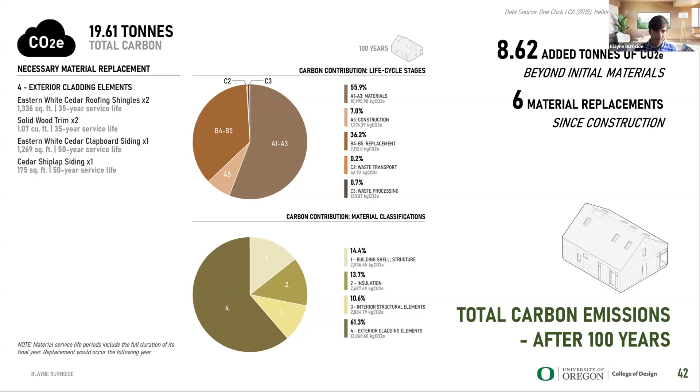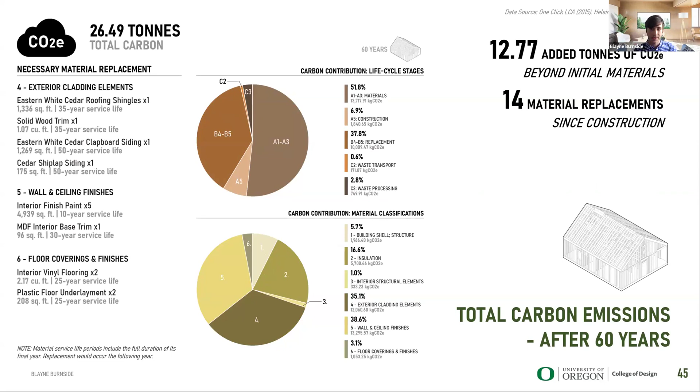Now we'll run through the standard constructed house of the same design. Similar to the typical modular house, the interior finishes had to be replaced, adding 5 tons. After 60 years, just like the mass timber house, all the exterior wood cladding had to be replaced. And after 100 years, there's been 24 material replacement instances and over 20 added tons of CO2 applied to the initial state of this system.

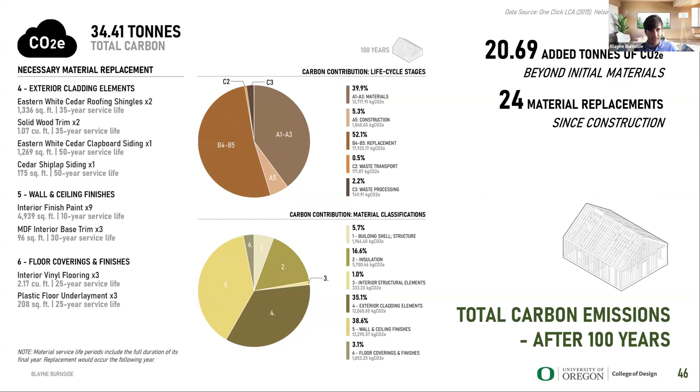So that is all without considering biogenic carbon. Now let's recall the biogenic carbon and factor it back in. With biogenic carbon considered in each system, you can see how each of them actually starts out net negative in terms of overall carbon when they were first constructed.

However, the typical modular house very quickly crosses the net zero threshold by year 30, with the standard constructed house following by year 60. After these respective points, both lightwood frame construction systems and their industry standard material choices are contributing to the problem of global warming instead of combating it.

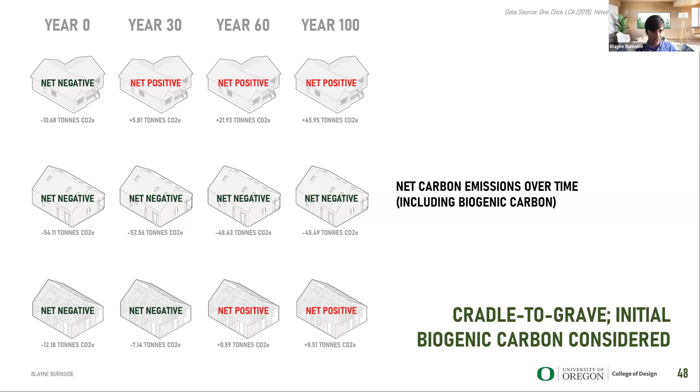The mass timber home, with biogenic finishes on the other hand, remains well under the net zero carbon line even after 100 years. Over this time, the home's embodied carbon has only risen from negative 54 tons to negative 45 — that's 9 added tons, which can suggest that under very, very perfect conditions, perhaps in a vacuum, this construction system can remain carbon negative for another 400 years.

So in short, the qualities that a biogenic mass timber constructed housing system would allow for is less frequent material replacement and a much longer lifespan for successfully sequestering carbon. As for the other two construction systems, it goes to show just how important material choices beyond structural elements are.

Something else to keep in mind, however, is how much more mass of material goes into making a mass timber house compared to a standard light wood frame. The same design in mass timber would require almost 2 times the amount of mass.

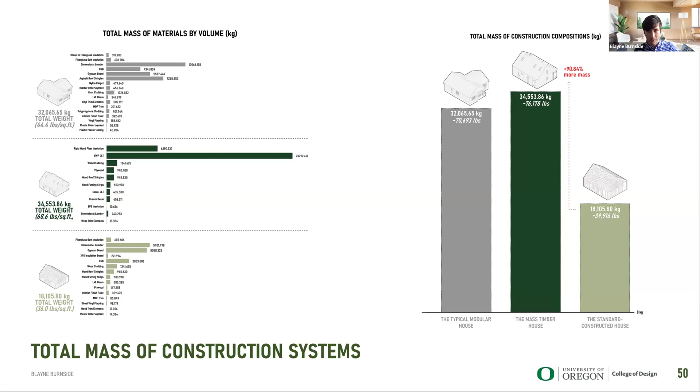This, of course, would require the mass timber home to have a slightly costlier foundation, but it also demands much more from the forest than a light wood frame home. This is why sustainable forestry and resilience in our forest sector is very important, and it's paramount that a mass timber construction system remains standing for the long run to make the most of its perceived advantages in durability.

Now, one last thing to leave you with is a quick suggestive difference in labor intensity between a mass timber panel system and a light wood frame one. Let's look specifically at the characteristic difference in the number of pieces in a CLT system versus a light wood frame system within a construction envelope.

If we focus on just an 8-foot section of a solid wall, the light wood frame wall, with studs spaced 16 inches on center, would require about 10 members to be installed, whereas the CLT created section is just a single piece. If we introduce an opening for a window, the light wood frame wall jumps up to 22 pieces to properly frame the opening, whereas the CLT wall is still just a single piece.

You can see how this general condition really aggregates to a dramatic difference in the total number of pieces between a panelized mass timber house and a light wood frame house. Additionally, the pieces of CLT left over from being cut for a window could be reused to make partitions, shelving, and doors, which is what's actually done in the BioMOD House design. This all equates to labor intensity and on-site construction intensity over time.

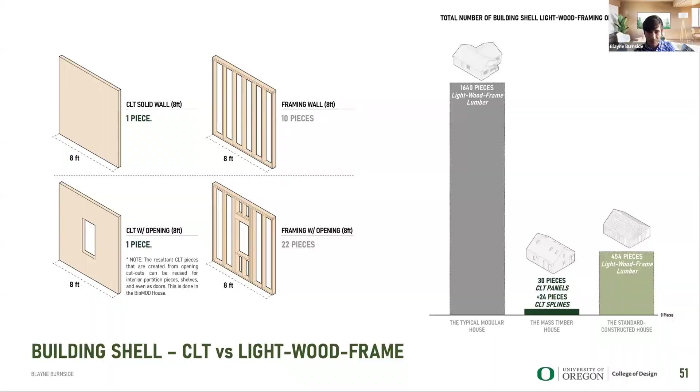So when it comes to mass timber integration within the single-family residential sector, I found there are many aspects to consider for its competitiveness against conventional light wood frame. Neither is right or wrong—I think it depends on the vision and values of each individual developer. However, what is shown at least is that there are true advantages of long-term carbon sequestration, material renewability, and construction efficiency of a biogenic panelized mass timber modular housing system.

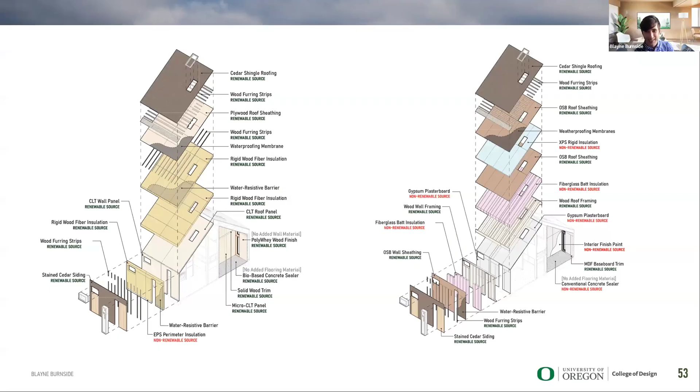Such a mouthful. By utilizing structural panels instead of sticks, the resultant construction system will require fewer layers in the assembly, bringing with it the benefits of fewer finished materials needing regular replacement, and fewer material resource streams, especially if you're using a biogenic based insulation.

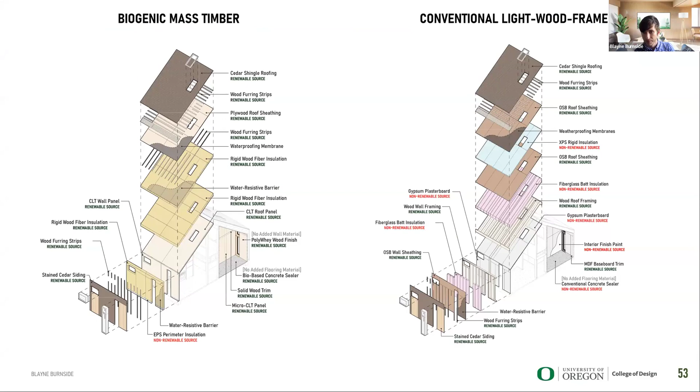While I didn't cover every performance topic that I'd analyzed in my research today, these are my generalized findings of the entire project. To sum it up, there are considerable long-term benefits of a biogenic mass timber construction system to give it competitive potential with conventional systems.

Cost, of course, is a factor that I've not mentioned much through this project, and it's really very important. But in general, it can be understood that the mass timber modular house would require more expense up front compared to conventional systems, but can see its investment potentially paid off with superior durability, energy efficiency, and health for the environment and households in the long run.

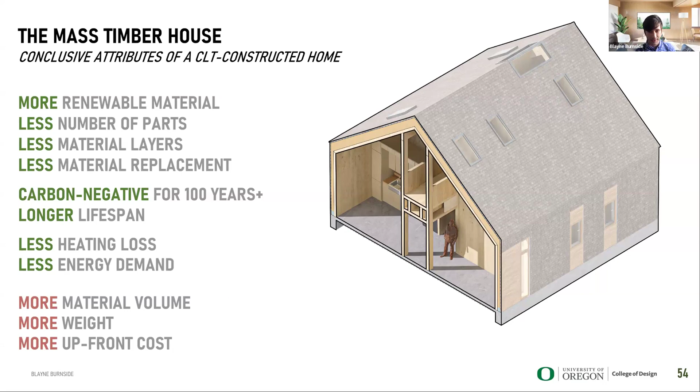Future studies would definitely benefit from including cost comparisons, as well as inputs of foundation and steel connections within the project boundary.